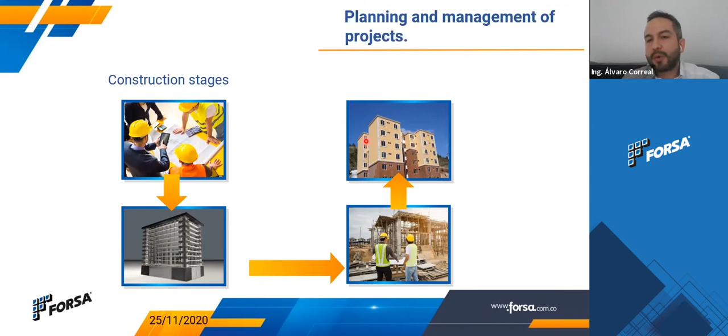Execution can be seen in this slide, even if this is not an industrialized project, but a conventional system. But it's here on purpose because we want to show you that control on the execution when you are working with industrialized construction is easily done, easier than when you are working with traditional systems. So at the end, you will have finished your project in less time, saving resources, and the more important thing is that you save resources, but without affecting the budget, employment, and the quality of the final product.

At the execution stage, it's very important for us right now and always, but we have to include new checkups that you must do.

As I was saying, you need to have at least one leader who masters his job to lead every crew. So you will have a crew for the formworks, a crew for the MEPs, a crew for the steel installation, everything. This guy must lead the quality and the technical aspects of the work, but also give instructions about self-care and caring for others, keep control over the group about their activities, and give instructions on daily labor.

We need to have a new kind of professional on site, because we used to have someone like a foreman or a junior civil engineer checking all the technical aspects of the works. But we also need another guy in charge of not only monitoring the activities and predecessor activities and doing checkup lists and documentation, but also working on safety and health inspection.

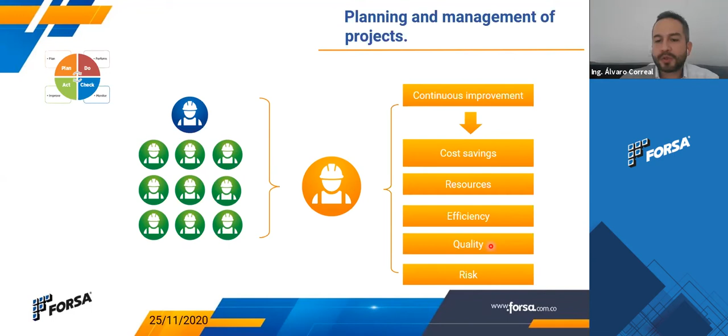Efficiency we define here as achieving the same objective with less resources. So the processes must be well defined with actors of every activity. They should have responsibilities defined according to the expertise of these actors, and the time that must be adjusted by these new protocols for the pandemic, and the cost, which is related to increasing the productivity and the efficiency.

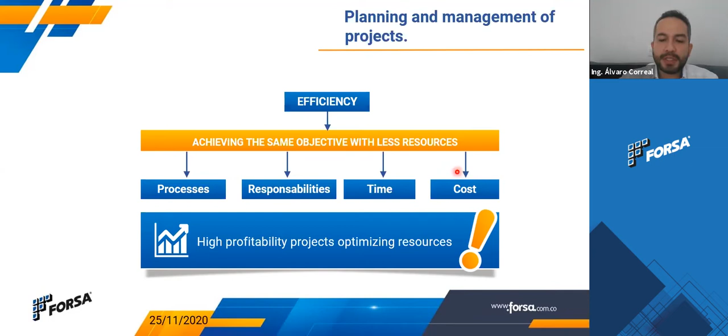Now we are going to have a look at this comparison of schedules. We have here on top an industrialized system schedule, and on the bottom a conventional system. This orange color is the foundation - as you can see, it's taking the same weeks for both systems because it's basically the same activity.

This blue one is the superstructure, and in industrialized construction it's taking only like 2 months and a week, while in the conventional system it's taking like 4 months, so double the time. We will see that later.

The green color is the inner walls activities. In the conventional system you have to build inner walls with bricks or gypsum, or any activities related to the inner walls. In the industrialized system, you pour the inner walls, outer walls and slabs at the same event, so probably all this together, the blue and the green, is all the structure.

And if you join this together also in the conventional system, you have like 2 or 3 times for the same activity. This pink color is the finishing stage, which, since you're already working with our systems, you know that with our system you achieve a very flat surface, so it takes less time to do the same finishing compared to conventional systems. As you can see, it's also like 2 or 3 times for this activity.

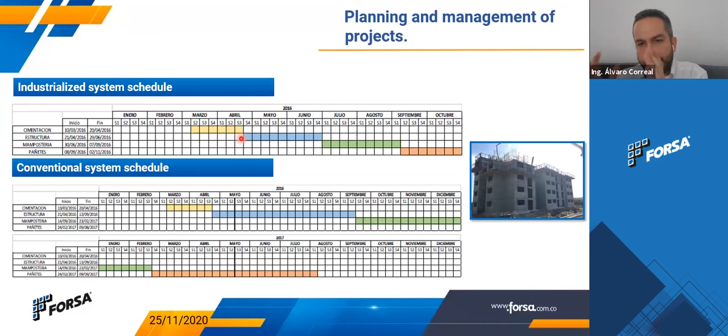Okay, now we are going to talk about labor estimation.

For labor estimation, we need to consider activities like the formwork works, the slab works, and concrete pour. But you also need to consider the distance these guys are going to be moving the formwork, and the self-care and where these guys are going to probably meet each other. So we need to create additional roads to avoid this crossing, to avoid the workers being in contact.

So the normal performance for shutter hands, I mean the guys working with the formworks, with a novice guy, talking about built-up area, it is 0.75 square meters per hour per man. And normal guys, meaning guys that maybe have had experience with the mold for 3 to 4 weeks, they can be working and achieving a performance of 1 square meter per hour. This is built-up area. And the experts, these are guys that have been working in the market for years.

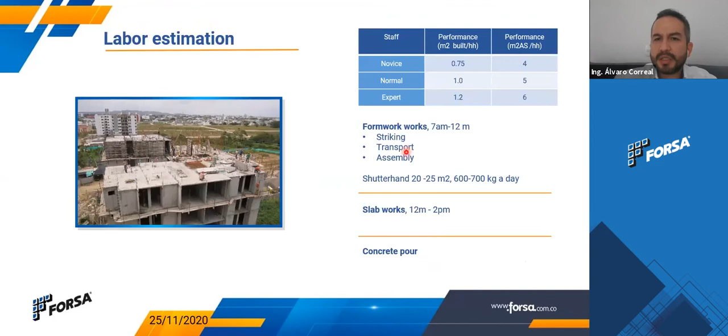And yeah, that's all. Let's go to the next slide please. Okay, in these daily activities, I'm going to talk a bit further about all these activities that we are mentioning here. So striking, the normal performance for a guy, but let me talk first about this apartment.

This apartment is probably 55 square meters, and we have here 9 shutter hands in total. Everyone, each of them, has a well-defined area. We have 3 guys working at the outer walls or facades. These guys at facades are away from others, avoiding being close to the workers inside. And we have 6 guys working on the inner walls.

These 6 guys, if you divide this 55 square meter apartment by 6, means that on average each guy is working like 9 square meters. So that's a good area, thinking about how far they have to be from each other to guarantee these protocols comply.

But it's also very important, because these guys are going to be moving the formworks when transporting, to check and guarantee that they don't stop in this critical route and don't cross too much in this part. Okay.

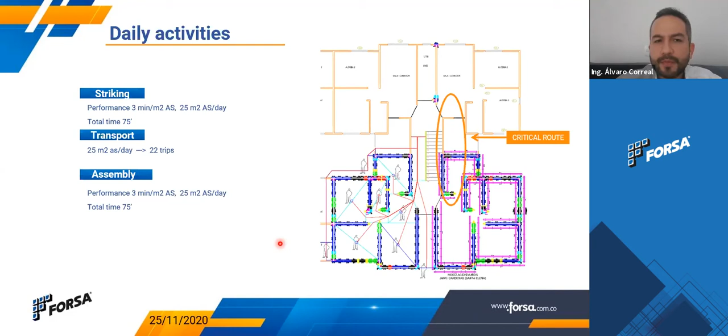Now, after that, we already talked about the morning. After that, when you have all the formworks installed, you proceed to the activities over the slab. Normally these activities are rebar and steel mesh installation.

The normal performance is from 10 to 15 square meters per hour per man. It depends on many things: it depends on the slab area, the bigger it is, the more workers you're going to need. It also depends on the steel amount, which is defined by the structural design, and on the work site equipment.

Why am I mentioning that? Because it's not the same to be cutting the steel there than having it all pre-cut. When you have a crane also to move and put this steel mesh or rebars there, it's easier and faster than when you do it by hand or using stairs. So it's very important to consider that.

For MEPs, we don't have many mechanicals, but we have electricians and piping. This activity also depends on how many plumbing points you have, the type of pipe you are using, and this activity must be made at the same time, simultaneously, with the steel installation.

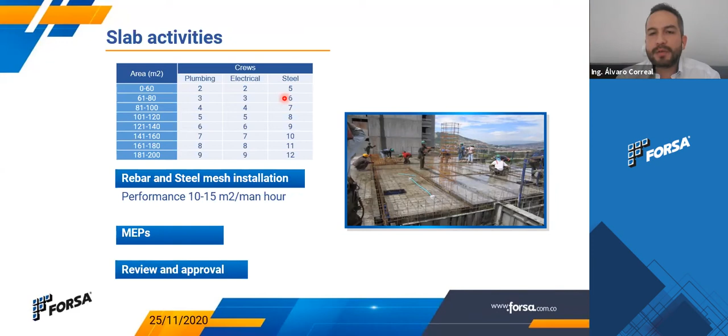In this image we see 5 guys pouring concrete. It can be optimized, but I want to mention that these guys are well separated, more than 2 meters away, so thinking about health and new requirements, they are complying with local regulations during this concrete pour.

For this we are talking about performances. We need to consider the volume, the pouring equipment, how many you have and their capacity, to guarantee a continuous supply. This is important because if you're working with ready mix concrete and have to wait half an hour or 15 minutes for the next car, and you have to pour 3 cars, you won't be as efficient as if you were preparing concrete on site, or if you manage to get the cars arriving one after another for a continuous supply.

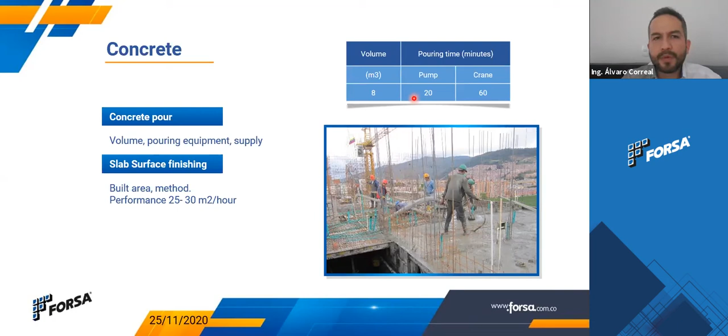Okay, so let's start with an example. This, we were talking about 61 square meters, with a cycle time of 6 hours, when this cycle time is the time it takes for striking, transportation, and assembly of the formworks, okay? And the performance, we are going to use 1 square meter per hour per man, which was the normal performance of a man, okay?

So the formula, this is the apartment, 61 square meters. It's basically, you divide 61 or 60 square meters by 6 hours, and then you divide it by 1 square meter, so you need 10 men.

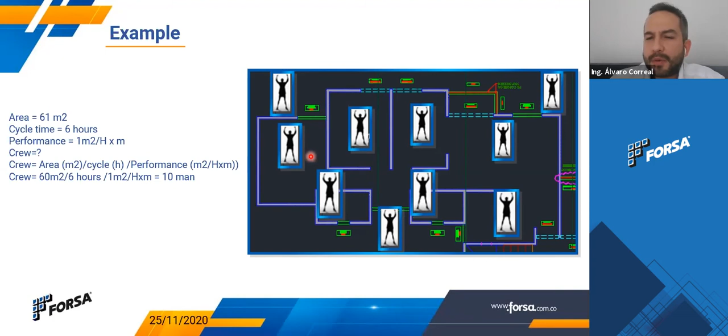And then you make the distribution. Let's see if it works. You have one in this space, 2 for this space, number 3, number 4, 5, 6, 7, 8, and then you have 2 guys working at the facades, and this guy, so you have 3 guys working at the facades and 7 working inside. Yeah, it looks like a well distributed way for these guys to work.

For the safety system, which is very important also today for safe work at heights, it's imperative to have a safety system like the one Forsa have designed, because this system allows workers to walk and work at facades with ease. Forsa has designed a complete system that complies with the most demanding norms and regulations internationally, like the OSHAs in the US, the Brazilian codes.

So this system guarantees that your workers, if installed correctly, of course, are going to be safe working at heights. Talking about how many sets or how many perimeters you need to have, our recommendation is to have one perimeter of the whole floor, as you can see here. The whole floor, not only the perimeter that you are working in, okay? And additional to that, have at least another one for the upper floor. Because the more perimeters you have, the fewer workers you will have using the same paths. That means less risk of accidents and less risk of contagion again.

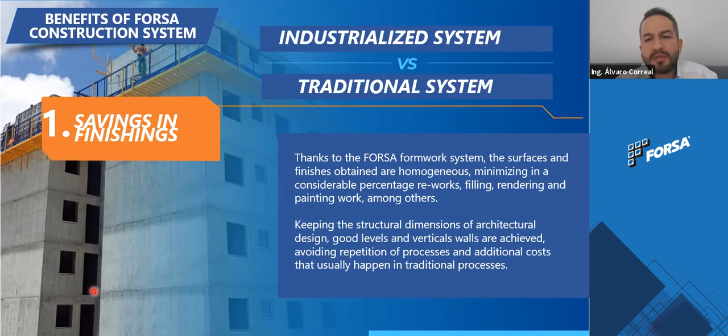Okay, so savings in finishing. As you know, our surfaces are very flat. You have very well-defined corners. The windows and everything can be optimized, and they are very precise. So at the end, all of this is going to represent money in finishings. Less money, less resources, fewer workers, less risk of contagion also.

The second benefit that you will get is the reduction of administrative costs. If you remember, in the schedule comparison that we made, it was 8 months against 15. So that's 7 months, or almost half of the time of the project, when you are going to be saving money on all the fixed costs that you have: the water that you need to supply, the safety, the security guys that must be there, the engineering, all the guys that must be there supervising, not only the guys on the execution. So if you compare the savings of one system against the other, you can be saving up to 40% of the costs compared with traditional systems.

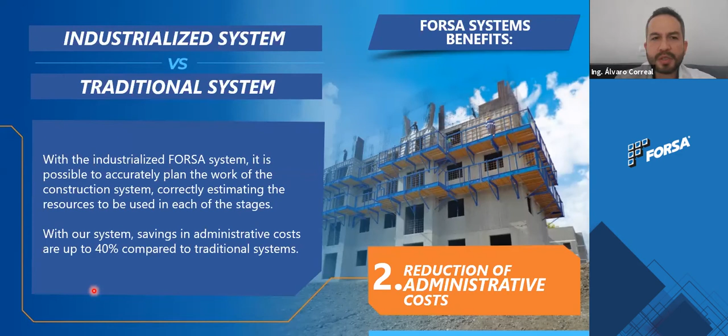Another benefit that you get with this system is less and more productive labor. If you see here in this image, there are 3 guys pouring the concrete. So this guy here, there must be some other guy, maybe this one, doing some vibration, or maybe he's just moving and handling this pouring equipment. But what I want to say is that it's very efficient, and you don't need many workers to use this. So again, less risk of contagion.

Workers, as you are going to put them on an area and they are going to be working on the same area every day, become specialized and become experts just some days after repeating and doing the same every day. This system is very light, it's hand portable, and that allows the crews to work orderly and with better performance, as I said before. Each worker can assemble a big area, and that reduces the required labor, and again, less risk of contagion, which is the message that we want to leave for you today.

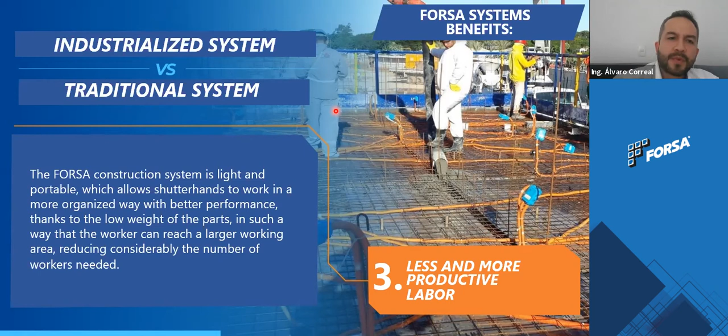Another benefit is less waste, okay? Because as you know, when you are pouring monolithic walls and slabs, I mean, you are putting the inner walls, outer walls, and the slabs at the same time. So you achieve better finishes. You reduce additional activities, you reduce corrections. The concrete placing is precise, so it reduces concrete waste.

And something that is not very often mentioned is the debris disposal. With this kind of system, you don't have to use wood and you don't have to use additional materials. So the debris is only some small waste of concrete and probably the tie covers. It's not too much. So this benefits the environment and also your budget, because you don't need to have many trucks moving debris and waste every day, like I have seen in traditional systems and you've probably done before.

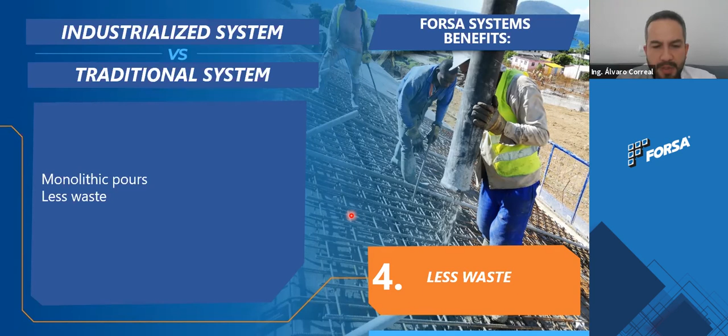So if you install it in a proper way, if you have good practices every day at the assembly and you make the correct maintenance to the formworks, you can achieve that minimum deformation. So concrete finish, as this guy is looking at the concrete there and he's in love with it, is because it's very flat.

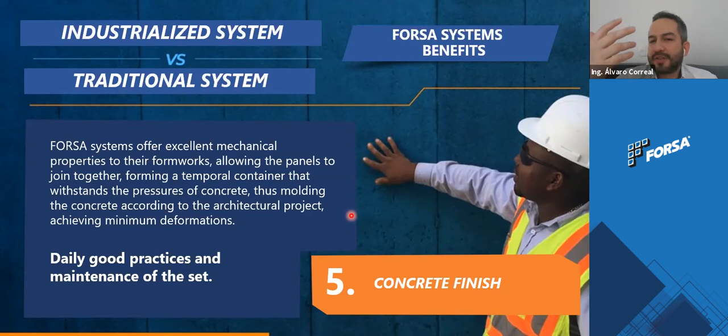Okay, so we're going to talk about cost comparison. If you like the numbers, this is the fun part. Okay, so we are going to talk about a comparison, direct cost of the thick work, the cost per square meter of built-up area, the savings that you will achieve for materials and labor for each activity, the total savings that you're going to obtain by building with aluminum systems, and the percentage of incidence of the cost of the formworks in the total construction cost.

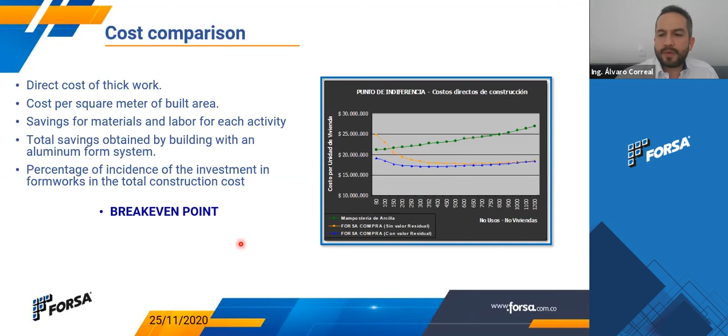Because you can probably think, okay, this is expensive, but it's an initial investment that you will recover and you will reach a break-even point, and you will see that it's achieved easily. So we have this houses analysis. Important to show you that with this system you can do whatever you want. So you can have these architectural details like these columns, not only the walls. You can build sloped or inclined slabs like you see in this project. A very simple one like this one with a different kind of roofing.

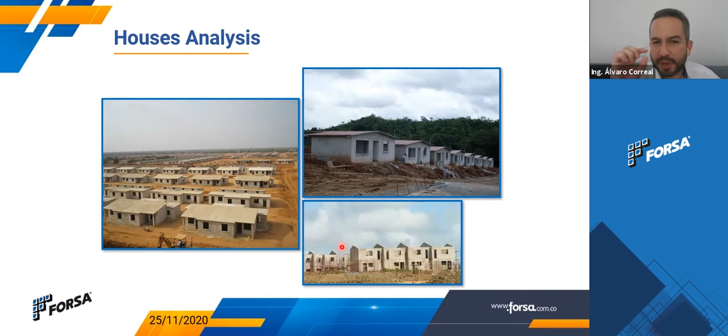Two-story houses. We are talking about houses in this example. We are going to do an analysis of an actual project. In this project, we are going to compare a concrete house versus a house that was built with concrete blocks. The project was 500 houses in El Salvador. The built-up area was 100 square meters. They had only one Forsa set.

We are going to talk about US dollars as the currency. Walls and slab thicknesses were 10 cm. The steel reinforcement was 15 kilograms per square meter. Free height 270, and concrete was ready mix. And the formwork area was 513 square meters.

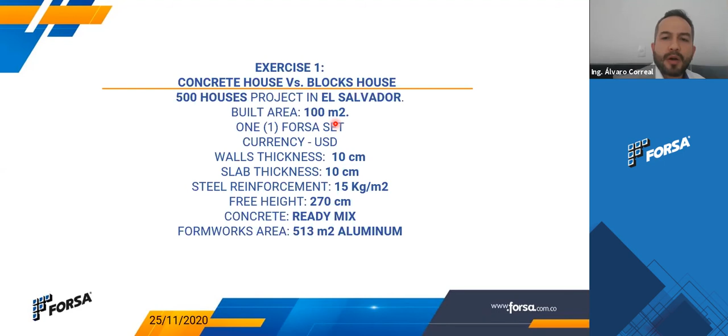Something important here to tell you: if you want to calculate in a very fast way how many formworks you need for a project, if you divide this by the built-up area, you will have like 5 point something. So if you have, let's say, an apartment or a house of 60 square meters with slabs, you multiply it by 5, and then you will have an accurate number of how many square meters you need for this project to be built.

Okay, so in this exercise, we made all the numbers for these concrete masonry houses and for the Forsa system. The difference here is that with the concrete masonry, you don't need to do an initial investment. So it's 0 here. With the Forsa system, you need to buy the system. So there is this 437,000 US dollars. The materials, you can see a saving here, 338, not very slight really. Labor, you're going to save some money also here.

Materials for roof, another saving. So at the end, you have all the activities here, and at the end, you're going to have a total cost for this. Let me remember, 500 houses of 6 million something, and with Forsa system, it was 5,200,000. So the total savings for building this project with Forsa was more than 1 million US dollars.

Cost per house, if you compare it, 12,000 against 10,000, and the cost per square meter, 127 against 104 for the Forsa system. Okay, so the savings per house were 2,345 per house. This is per square meter, the concrete volume that you were using, just numbers to show you at the end that the savings for this project was 18% on the cost of the project.

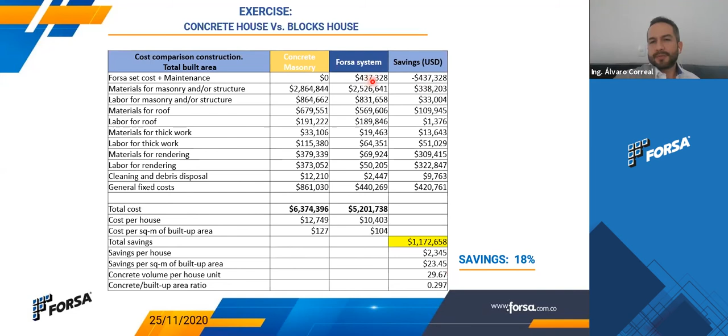And something more important, you also have the Forsa system. You already bought it. So you earned 18% on a Forsa system. You used it only 500 times, but the expected lifespan is 1,500 uses. So this system can be used to build another couple of projects the same size of this one. And you're going to be saving 437,000 US dollars. So this is very good.

Construction cost, sorry, there are some words in Spanish, but I can just show you. Here, this blue is the Forsa set that you had to buy at the beginning. This is the cost of the materials for the structure and the cost of the labor for the structure. And then here is where you have the more important savings, and it's everything else. Here you have the roofing. This red one is the general or indirect costs of the project, which we already talked a lot about. Also the finishing, the thick works and everything. This is where you are saving 18%.

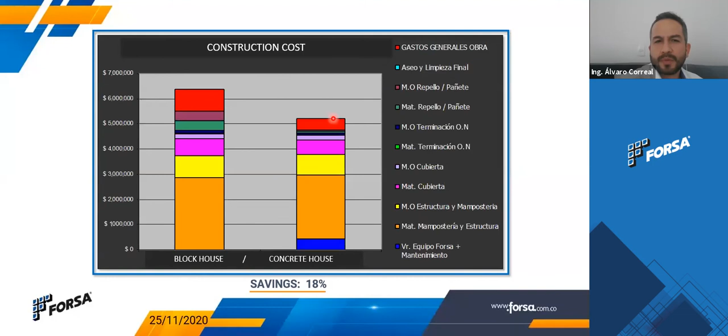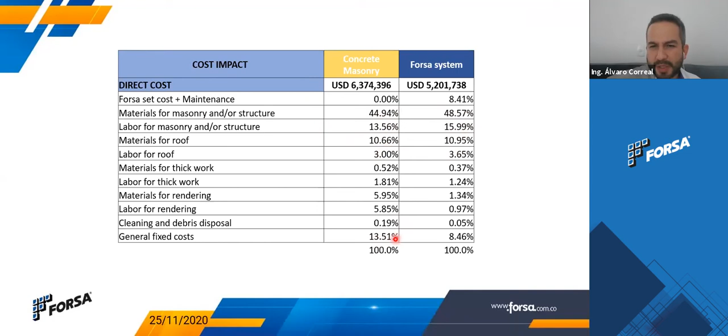This is the comparison in terms of the cost impact. So the materials, almost half of it, labor, materials, this is for houses again, and the general fixed costs or administrative costs, the most important ones there. This is the direct costs and the total savings, and see how they impact in absolute values. So the Forsa set cost is here. You have also, let me see, general, this is the administrative cost, rendering materials. You see how important they are, the rendering labor, and this is the materials. This is the most important savings that you are going to get with the industrialized system.

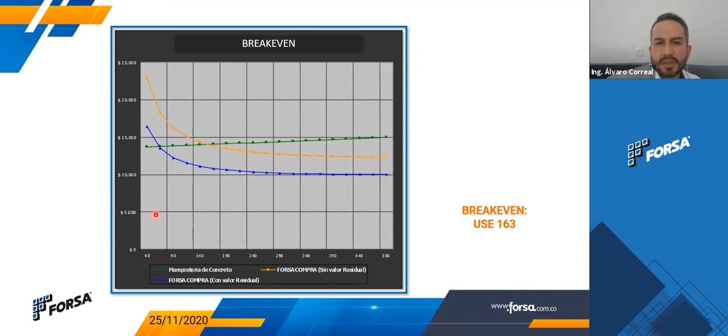And the break-even point was achieved at house number 163. This is where the investment that you made on the formwork was recovered. This is where you paid for your formwork, and then you start to earn money and to be more efficient than this green one, which is the concrete blocks construction.

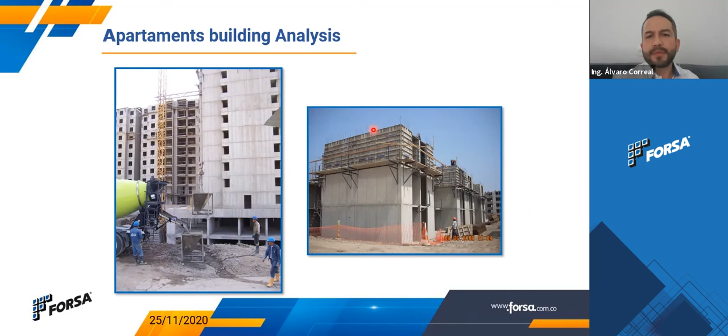Okay, this is an apartment building analysis. Let me see the time. Yeah, we are okay. Anyway, we're going to talk this a little bit faster.

This project was in Brazil, 200 apartments, built up area 69 square meters, one Forsa set. Numbers are in US dollars. Wall thickness and slab thickness are 10 cm. Steel reinforcement was higher, 20 kilograms per square meter. Free height 270. Concrete, ready mix, and formworks area 354. Again, if you multiply like 70 by 5, it's 350. And you see here, very similar.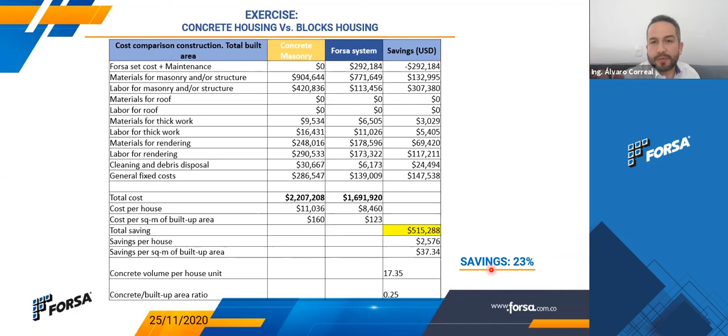And again, you're also having the Forsa system at your disposition, and you can use it. You used it only 200 times. And if you can use it 1,500 times, then you can use it for 4 or 5 projects more, if you compare it to this one.

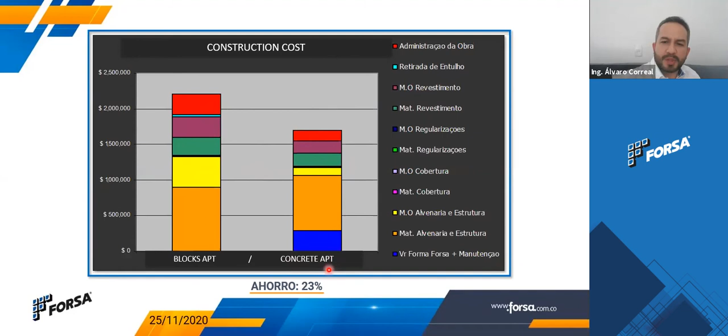Construction cost, again, you can see a big difference here in the labor, a very big one. Another important one here is the administration. And this purple one is the finishing stage. So at the end, in this project, they were saving 23% of the cost. Impact, again, let's see the next one, which shows you more.

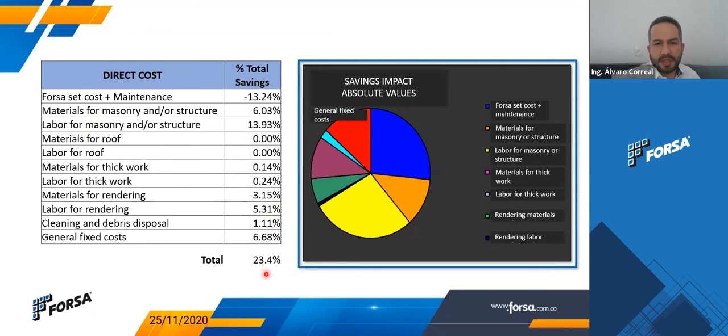Masonry, this is the very big difference. The labor for masonry and structure, you're saving like 14% here. Materials, you're saving 6%. For rendering, in between materials and labor, you're saving like 8%, and general fixed costs 6%. At the end, you have 23% cost savings. Break-even point for these guys was even shorter, and at use 89, they reached this point where they paid for their investment in the formwork system.

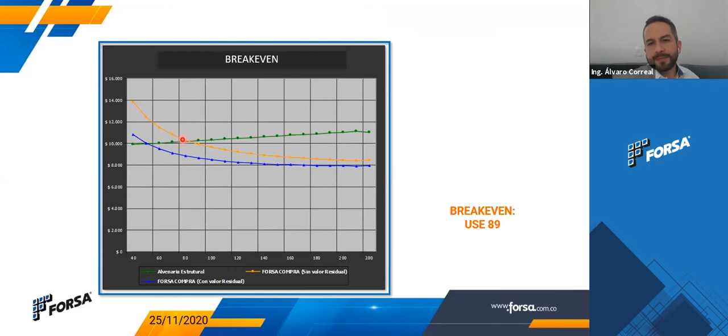It's very nice. So, general recommendations. Why are we talking about this? Because, as I said before, it's not only about buying the system and having it there, but you need to adjust all the activities: earthworks, urban planning, the networks, the licenses you get, procedures, everything. You need to take your project design and adapt it to standardized dimensions and free heights. Think about the dimensions of the tiles, the windows in your country, whether they're standard or not, the doors, everything, and how you build the foundations for houses. So everything must be industrialized, all the activities, so you have this working like a production line.

Last example on savings. This project is 10 buildings. Each building has 9 floors, 4 apartments per floor, so you have 36 apartments per building, and 10 buildings means 360 apartments. Okay, so we have this number here. And the labor, we're going to make a comparison.

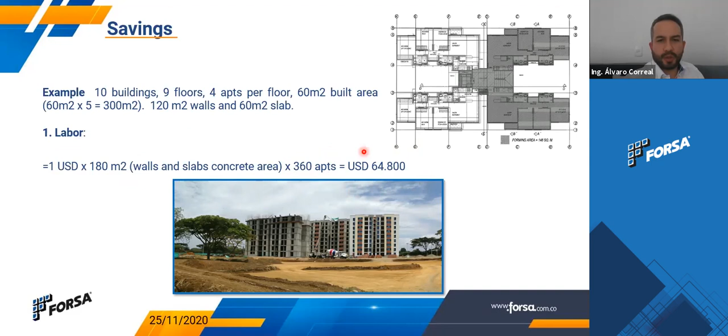$64,800. For structure corrections, by experience - our clients' experience - additional activities for corrections, for the kind of corrections you see in these pictures, for the corners and for the not-so-good finishing you get with steel, we can say $100 is the amount these guys pay to do these corrections. So the total amount you're going to be saving is $100 per apartment, multiplied by 360 apartments, that's $36,000.

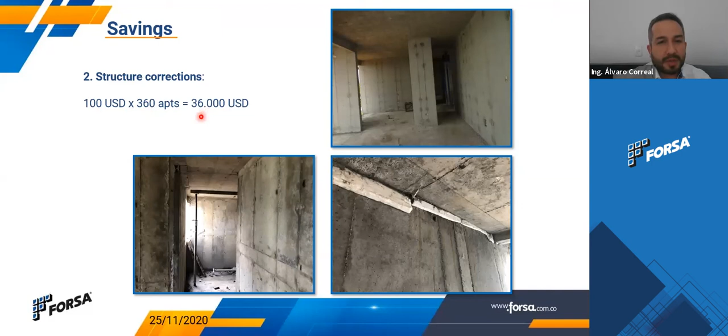Concrete waste: when pouring with steel, you have to pour the walls and slabs at different stages, so the waste of concrete increases by far, like 4%. And 4%, for a 20 cubic meter apartment, just in one apartment - let's calculate. If concrete costs $100 per cubic meter, multiply by 4% waste, by 360 apartments, by the cost of concrete...

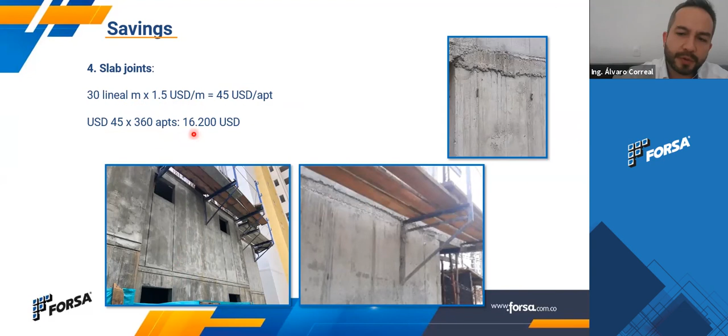The crane: if you're using steel formworks, you'll need a crane because they are very heavy. If this project is built in 18 months, then you'll be saving $54,000.

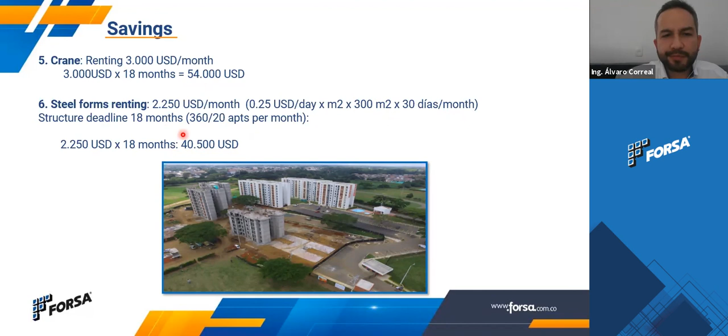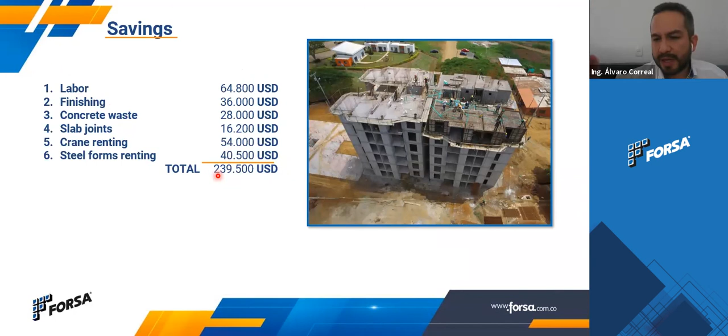And steel forms renting: normally the rent of a square meter is 0.25, or 25 cents, per day. We said we need 300 square meters of formwork surface by 30 days per month, and it was 18 months. So at the end, if you multiply all these numbers, you have $40,500 more in savings. So altogether, in labor, finishing, concrete waste, slab joints, crane renting, and steel forms renting, you will have savings of $240,000. With this money, you can go and buy an aluminum formwork system, which is by far better, and you can get better results.

So that was all we wanted to talk about regarding performance, and I also want to show you the products we have developed that are important for your projects. The first is the sanitization cabin, which sprays alcohol or whatever you need inside, and has a sensor - the worker goes inside and comes out the other side with a bath of this material, the alcohol. Portable sinks: you need to put these in some locations of your project to guarantee workers wash their hands every 2 or 3 hours. And the gel and soap dispenser - these are designed to be rough, to be usable in project conditions, because we're not working with gentle ladies, so they're very rough and resistant.

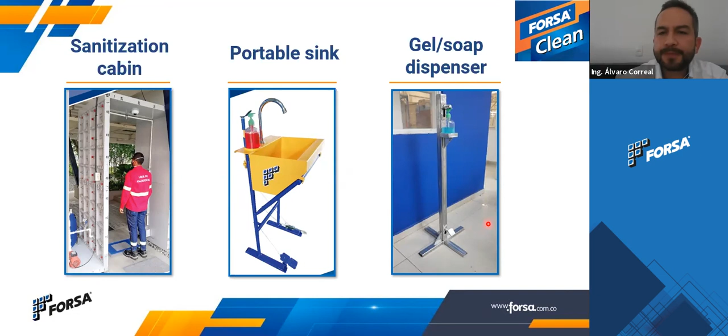Okay, there is some question here. It says, are there technical solutions that can be used to generate other circulation points to prevent assemblers from crowding at a point or high flow of people?

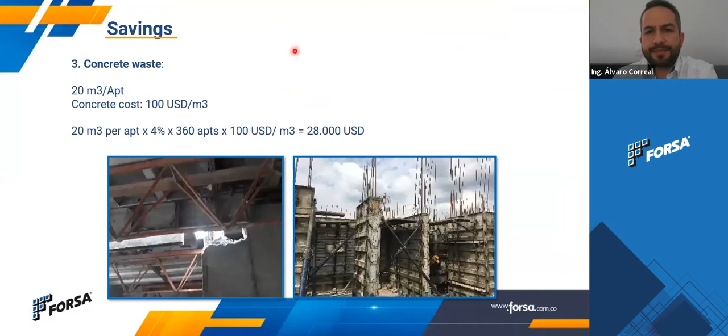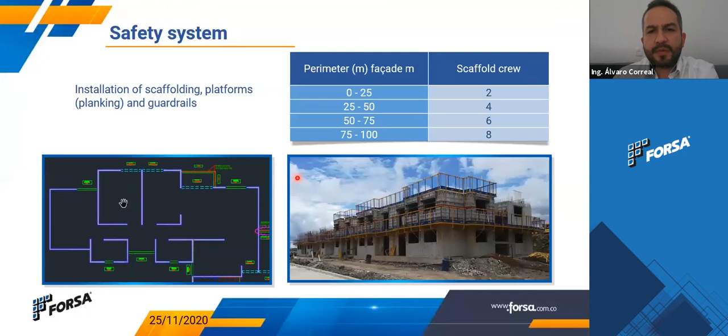Yes, let me go back in the presentation. Let's see this example here. So this is the hall, and this is the circulation that can give us some problems with guys crowding there. With our safety system, we can have this area joined together so workers can go to the next apartment using this path, and maybe go outside using the safety system to reach the next apartment. This is imperative for the guys working at facades. These three guys in the example cannot go inside, cannot use this hall. So that's three less guys working outside if you have the safety system installed. I hope that answers your question.

Another question from Ricardo Rodriguez. What kind of system or accessory have you designed to guarantee the accurate finishes of the step downs on the slab that have to be casted on the same pour? For example, an 8 cm step down between the room and a balcony. I hope I understood correctly, we are talking about a step, steps down on the slab.